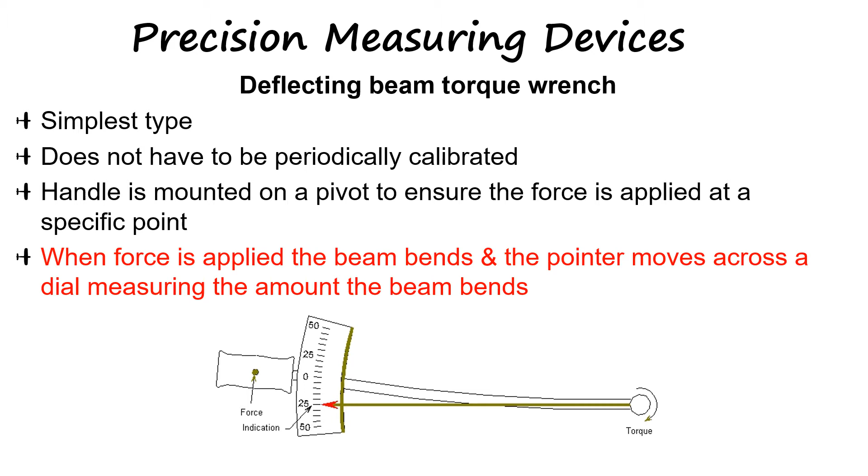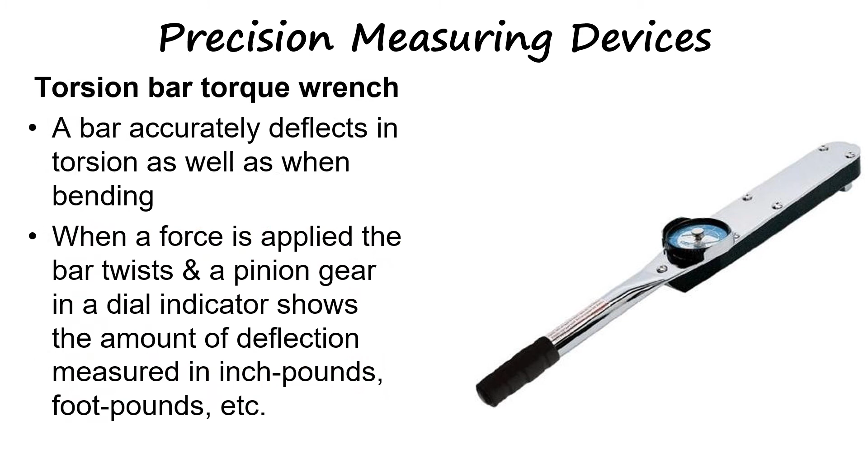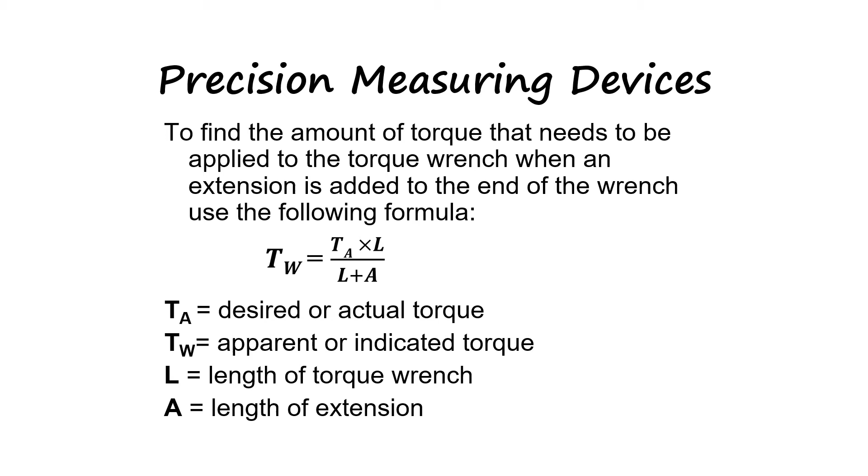There are occasions when you may have to add an extension to the drive end of a torque wrench. When an extension is added to the drive end, the actual torque will be greater than the indicated torque. To find the indicated torque that will give you the correct actual torque, use the formula given here. Here we can see where the values for A, L, T sub W, and T sub A in the formula on the previous slide come from.

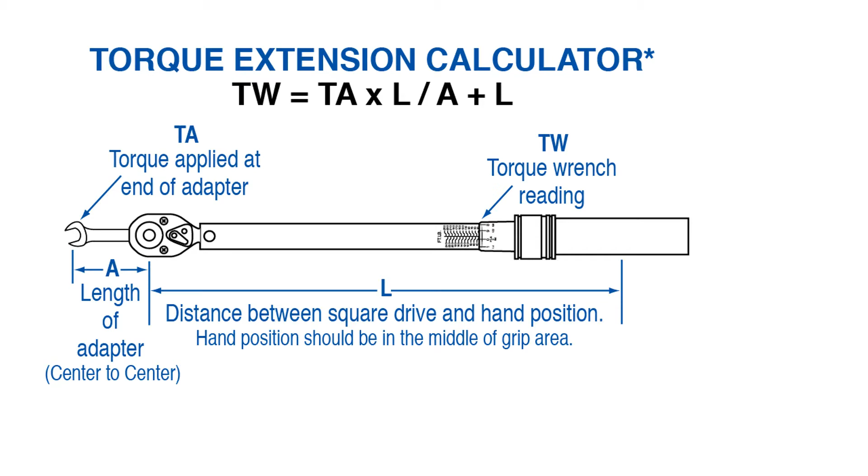Here we can see an example of finding the indicated torque when the desired torque equals 150 inch-pounds, the length of the torque wrench equals 20 inches, and the length of the extension equals 5 inches. The torque value indicated on the wrench would be 120 inch-pounds if the desired torque was 150 inch-pounds and the extension and torque wrench were 5 inches and 20 inches respectively.

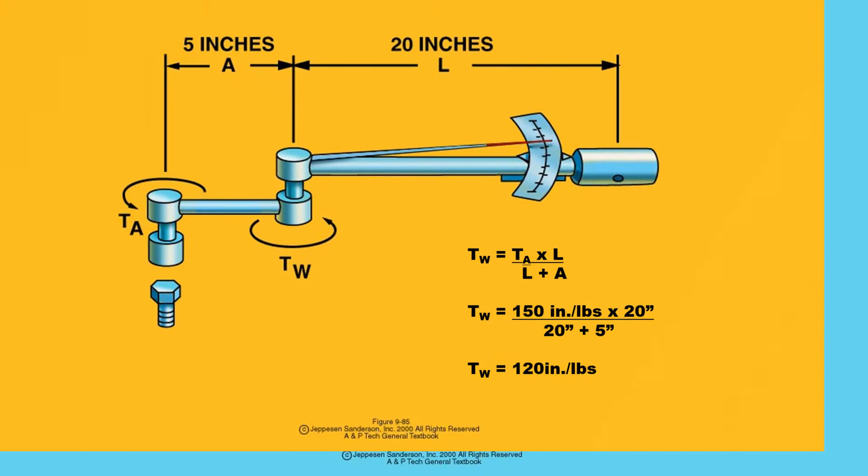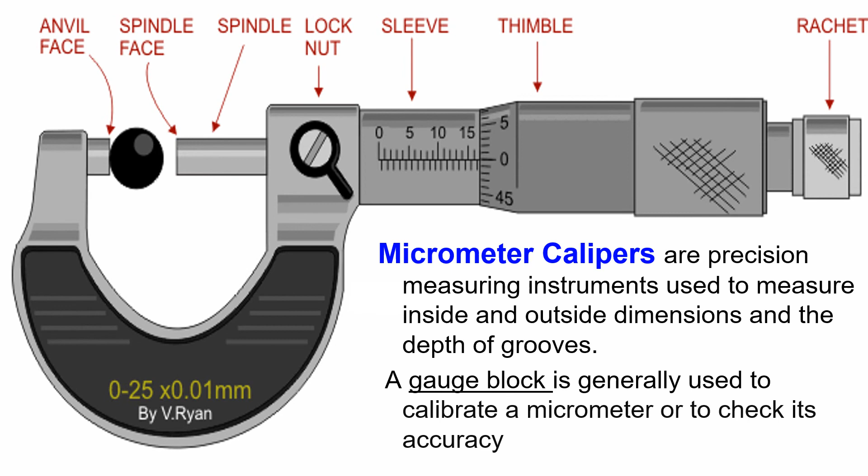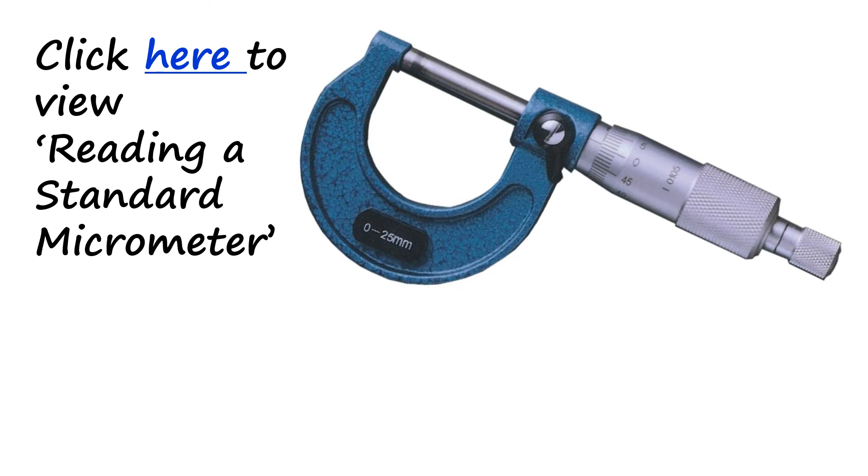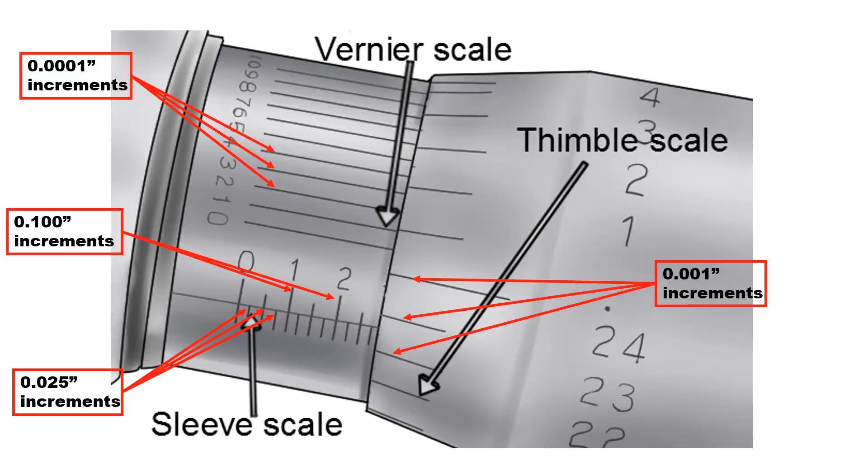The vernier scale measures in 10,000ths of an inch. To determine the correct reading on the vernier scale, you need to choose the line on the vernier scale that most closely aligns with a line on the thimble scale. This can be difficult and may require you to rotate the micrometer so that you are viewing each line in a flat plane and may require the aid of a magnifying glass. Here you can see that the line for 9/10,000ths aligns most closely with the line on the thimble scale.

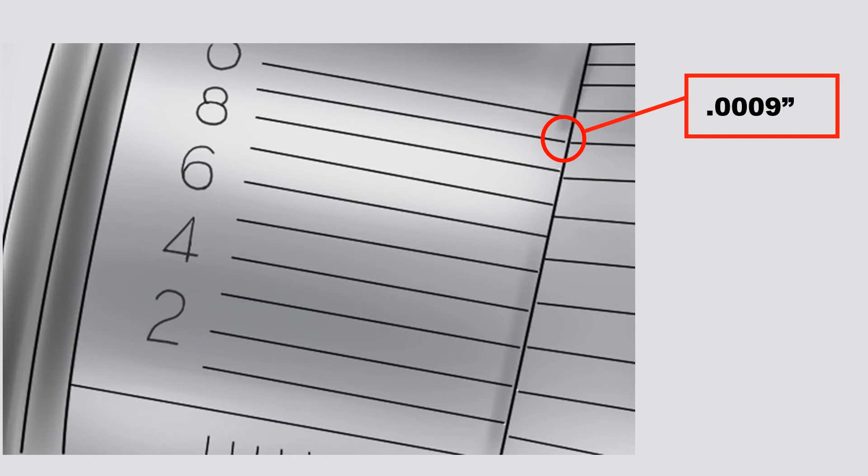Let us determine what this micrometer is reading. First, the number 2 is showing on the barrel or sleeve scale, so we write down 2/10 or 0.2. After the number 2, we see 3 tick marks. Each is worth 25/1000ths of an inch, so we write down 0.075 or 75/1000ths of an inch. Next, we see that the line on the sleeve scale falls between the lines for 19 and 20 on the thimble scale. So we choose the lesser of these and write down 0.019 or 19/1000ths of an inch.

And lastly, we see that the line for the number 3 on the vernier scale most closely aligns with a line on the thimble scale, so we write down 0.0003 or 3/10,000ths of an inch. Next, we sum all the numbers we wrote down to get a measurement of 0.2943 inches.